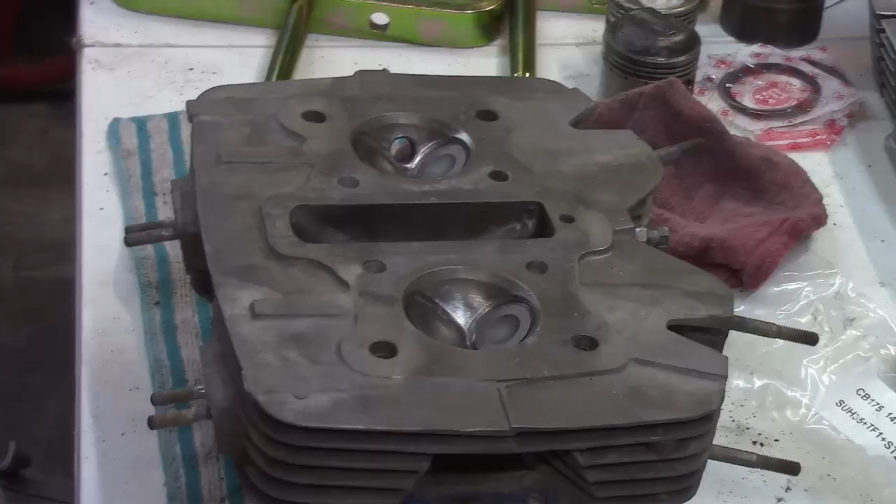Okay, what I got here, you can see it's the head. And I've got the valve sitting inside here. I've been looking at all kinds of different stuff, specs and everything. And of course, I bought new valves, so the valve seats and everything. Actually, like this portion right here, the shiny part, I don't need to measure those obviously because they're brand spanking new valves.

One thing I have noticed, and I don't know if I should get a hold of a common motor, but if you notice this valve here, these are the intakes. This one here, you kind of got to push it down fairly decent. This one here is a little bit easier to go in, or a little bit stiffer to go in. I don't know, but anyway.

I got some of this Prussian blue, so we can see where the valves are hitting. Then I've got the fine grade compound. We have the coarse grade compound. We have the old manual suction cup lapper. And I do have a section of hose here.

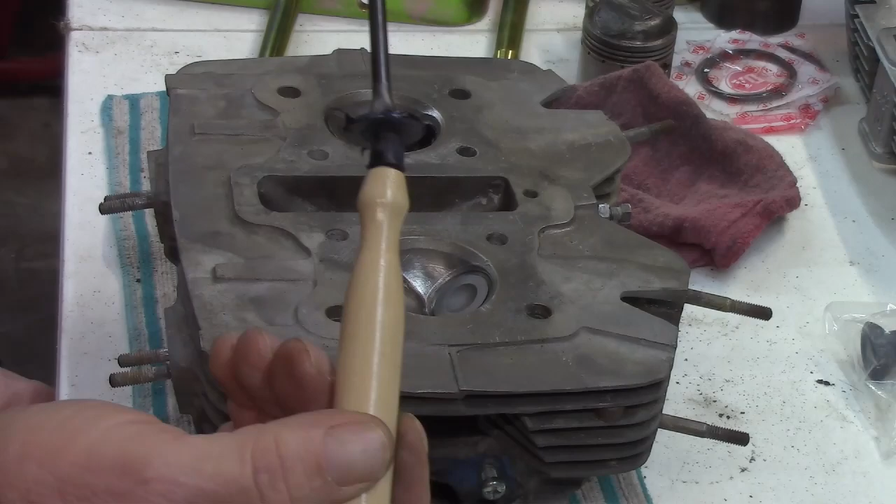And we're going to coat the end of the seat here, and I may have went a little too crazy with it. It's better too crazy than not crazy enough, right? Okay, so let's put it down here, set it down, kind of move it, I guess, and look at, I think I put too much on here. Let's try this again. Take some of this off. Try that again.

And see if I can see. Looks like it's making contact all the way around. Maybe try a little bit more. I don't know, never done it before, but it looks to me like I'm not really missing any spots. So let's wipe this one off.

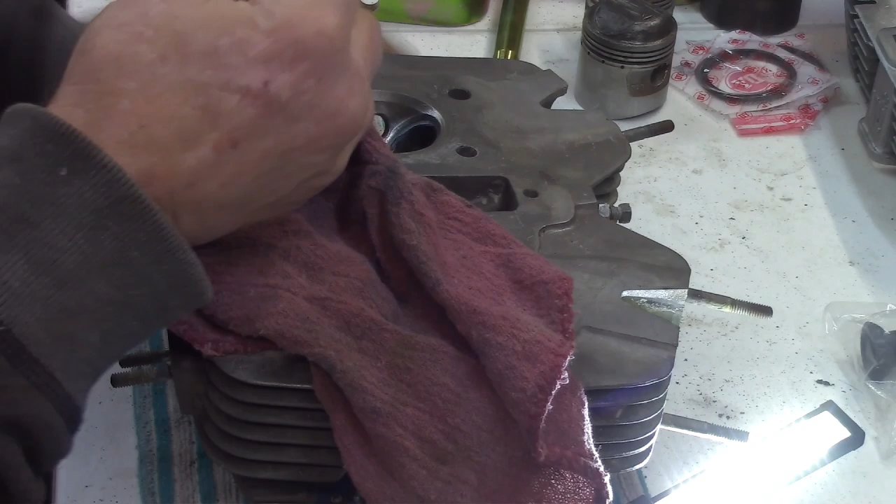And blind myself on my light. Okay, let's try the other one.

Sorry for any of the background noise, guys. It's a little chilly outside. Got the heater going.

Okay, so I don't know, man. Looks like it's sitting all the way around. Okay.

Now supposedly, and I gotta find my plugs. I got some of those little silicone plugs from when I powder coat stuff. I gotta find my powder coat stuff so I can find my plugs. Alright, so let's do this valve here. Try just pushing it on and not spinning it.

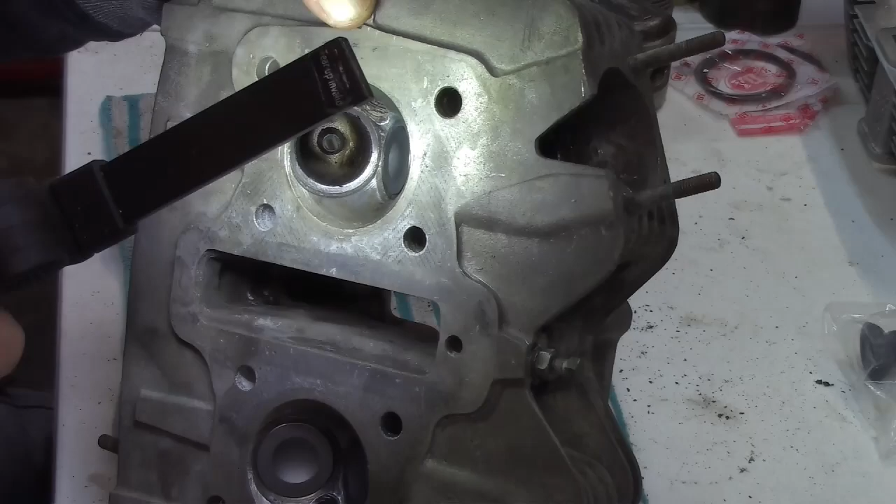Okay, so that one, let's see. I don't know if I'm going to be able to get you guys to see down there, but I didn't spin that one. I just pushed it down in there and let it sit. And you can see there are spots where the blue didn't go. And I do have the blue all the way around it, so we'll wipe this one off.

The intake ones definitely go in there tighter than the exhaust ones. Yeah, maybe that's normal.

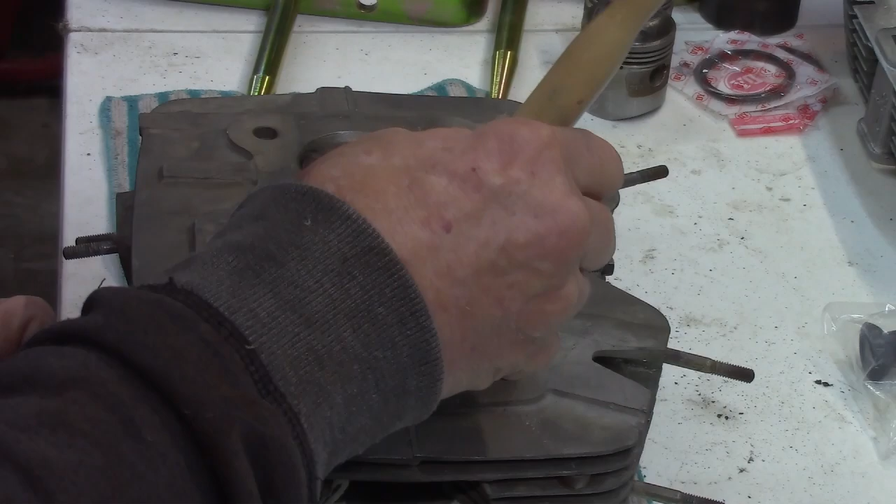Okay, so just pushing it in. Yeah, there's one little spot where it's not quite touching, but it is all the way around the valve. So, all right.

So anyway, back to the plugs. I guess there's two holes. I'll show you here in a sec. Well, you might be able to see them. Right there. That's the spark plug hole. I need to plug that because apparently you can plug those once you've got your grinding done. You can put, you know, like parts cleaner or whatever, pour it in here, and if it's not leaking out, you know you've got a good seat. So anyway, that's what they say.

Okay, so let's take this, this is some coarse. And we're going to take some.

Kind of put it on there. Drop it down. Well, my sticky thing is... my suction cup is spinning. Maybe the lick and stick method isn't that great. And that's the tiny side. Maybe try the little fatter side. Try licking and sticking that side.

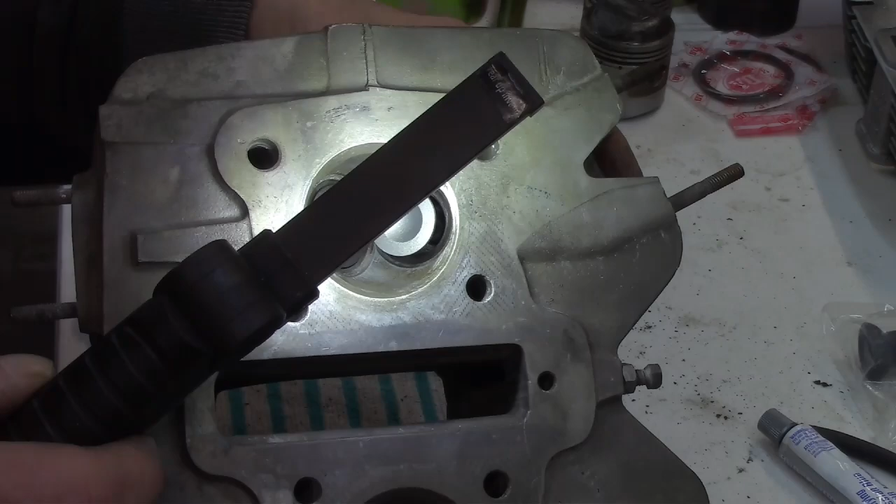Well. I mean, I don't know about the whole parts cleaner stuff down in there because it's not going to have the spring on it. I watched them do it and they did not have the spring on it to hold tension on it. Or maybe they did. Maybe I need to rewatch that video again. I don't know. But either way, if I don't do that and put the springs back on, I don't know if it's gonna leak out or what. Beats me. So let's put some on this other one.

Well, it seems to be sticking better to this valve. Of course, I say that, and then it comes right off. Woo. Got away from me. Let's wipe this one off. Take a look.

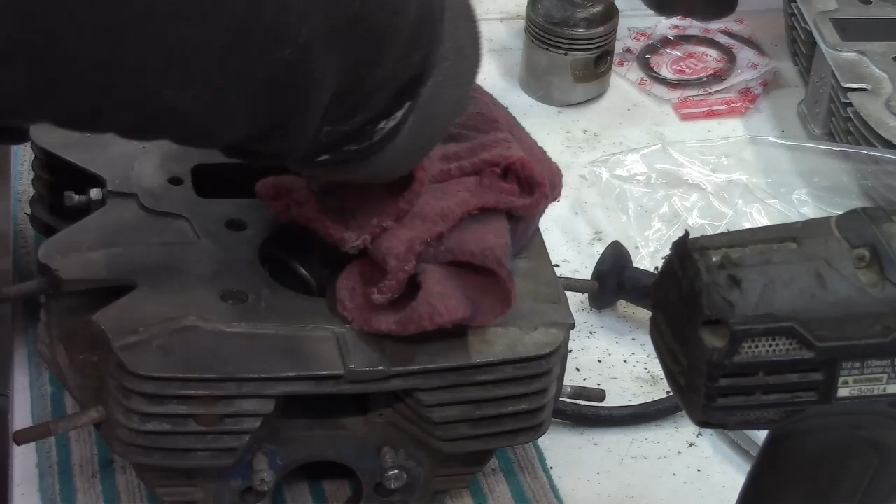Okay, so let's try putting this on the end. And then we'll put the drill on low. And is it not spinning? Is it spinning? Very light pressure, guys. Let's see. Got everything sticking to me. See if the seat looks any better. Yeah, that could be better.

Alright, so let's try this again. Well, even with that, the hose is liking to spin. Just doing it by hand still works better than the suction cup thing.

Still got to get all these gaskets off of these intake things, the side things where the tach thing goes, the spark arrestors. I can get all those off there still. Exciting stuff. I'd turn it around the other way, but I'm right-handed, so. See if that's done anything.

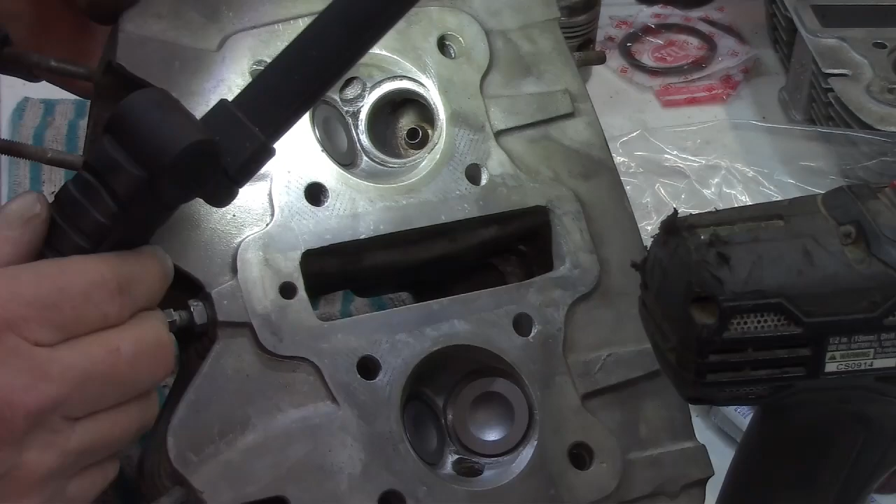Let's see where this is actually sitting down in here. So, I don't know, I mean, it looks pretty good. I think I'm gonna, let's see if that covers that area down there. No. Because there's some sort of buildup. Yeah. Come right off. I haven't really thoroughly cleaned this yet, guys. I did stick it in the ultrasonic.

I'm trying to round up things to look at making a vapor blaster, as we had discussed previously, so I could clean all this stuff up. Got my eye on a used Harbor Freight sandblasting cabinet, so I may get a hold of the guy tomorrow and see if he's available for me to come look at it. He wants $100 for it. They're like $225 brand new. So, as long as all the parts are there, that'll work. I'm trying not to spend a lot of money to make one.

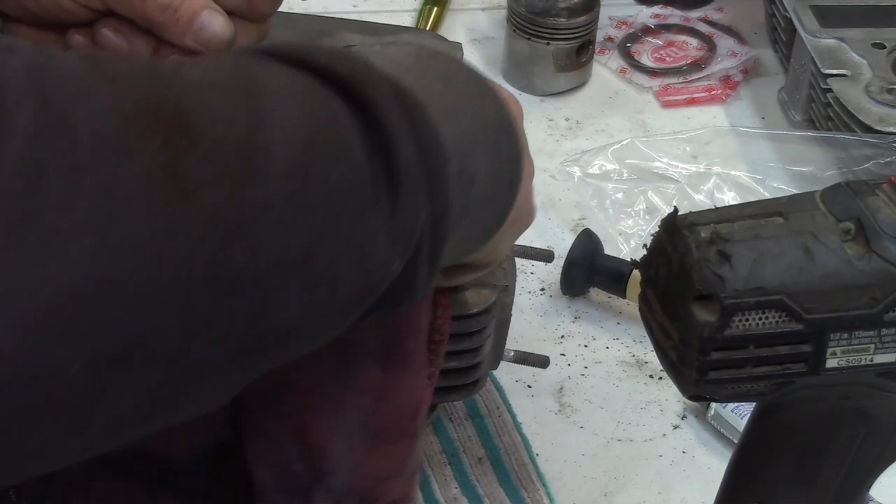Okay, so I think we ought to check this one. We've been spinning around and around while I've been yammering. And I couldn't find any information about doing this. Is each valve specific to the hole that it's in? So we've got 2 intake valves here. Let's say intake 1, valve 2. When you do these, it makes sense to me, you should leave that valve with that one you just did. That way, it's seated for that specific valve.

Let's see here. This one here is looking pretty good. Valve hole, let's just call it that. So, put that one down there. That seems pretty good. Okay, so that's coarse. We're gonna leave that, and like I said, once I get all 4 of them done, and I can find my little pluggy thingies, then we can put this in a tub, block them holes, I don't care.

I just put gas in there. It don't matter. Anything liquid, and see if they drip out. If they don't drip, then we've got them seated good. If they do drip, well, I guess not. So I don't know. So anyway, that was the coarse. So we will use the suction cuppy thing on the smaller exhaust valves because it seems to work okay.

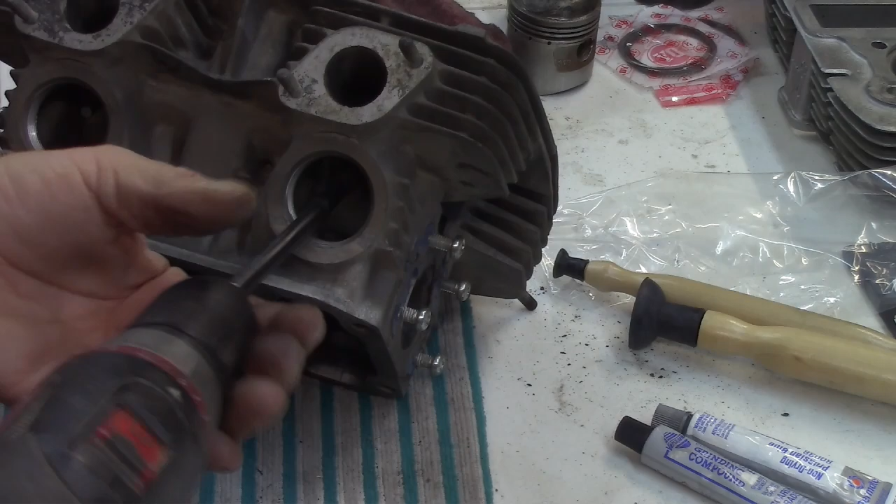I'm going to try this drill thing again. Yeah, why not? I'll just chuck it back in here. Yeah, I got a crappy piece of hose there. I do have a crappy piece of hose, guys. Where's my scissors? Maybe that's why it was kind of loose. I don't know. We're going to find out, though. See how that looks.

Now, Kane, I know you're going to be watching. What do you think about cleaning it and painting it? Give me your thoughts, man.

Dale ain't gonna watch. My shenanigans are too much for him. I probably drive Dale insane. Especially when I call him. But Dale, if you're watching, I hope you're doing great.

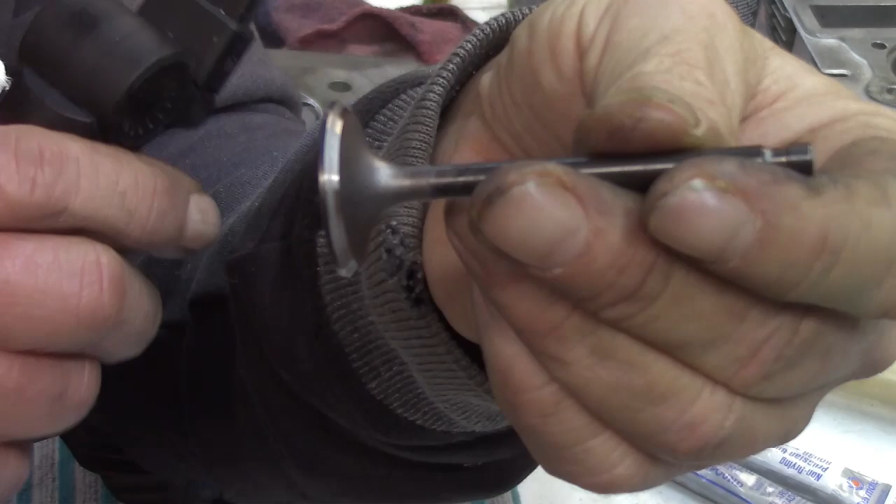Okay, what I am noticing though, I don't know if it's going to show up on here. The whole part of that seat, you can see where it's been ground. But it's not encompassing the whole seat from here all the way to the bottom. But looking down in here, it looks good. Let's shoot the other one.

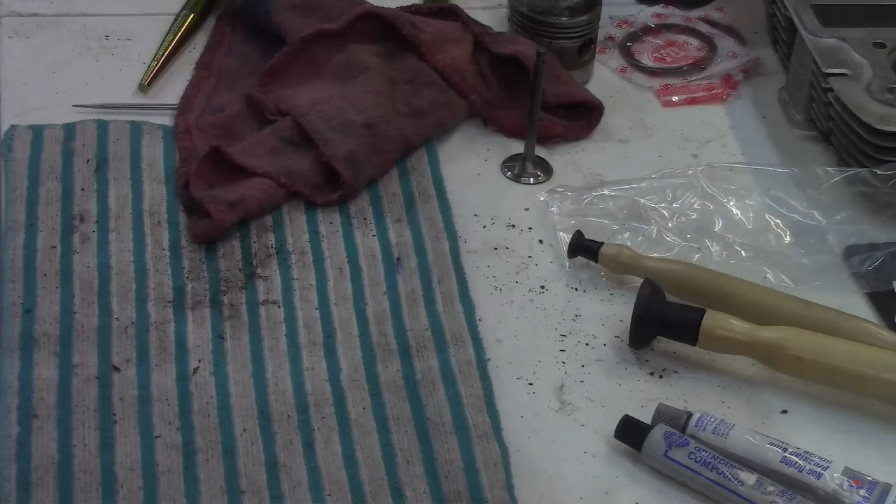It's pretty much the same. Just for giggles, let's grab one of the old valves. Kind of look at how it sits. See, it looks like it sits down there a little bit farther. So I may have to keep doing this because I don't know if this is going to show up on the camera.

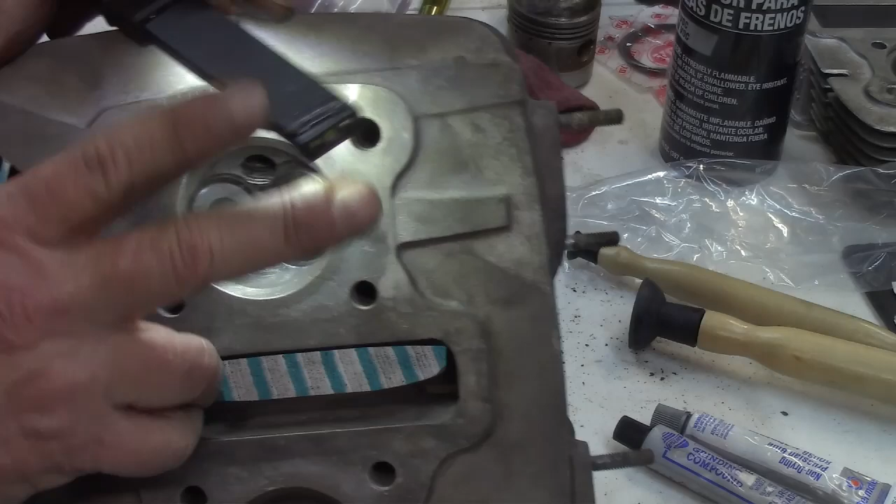You put that down in there, it seems like, trying to hold it and get light for you. Seems like from this edge, you know, to the seat, it's sitting a little more flush. And put this one in. Looks like it's definitely more proud. I don't think that's right. Yeah, this one definitely sits down a little bit more.

I wonder if that is the case with the exhaust side too. Let's double check. And I looked at all these valves. I thought one of them might have been bent, but that does not appear to be the case. So technically I could probably just reuse these valves, clean these.

Okay, now that one sits a little more. I don't know if you can see it. That one right there sits a little more proud. This is the original valve. And then that one looks like it's sitting about the same. So the exhaust sides look okay. It's the intake side that doesn't.

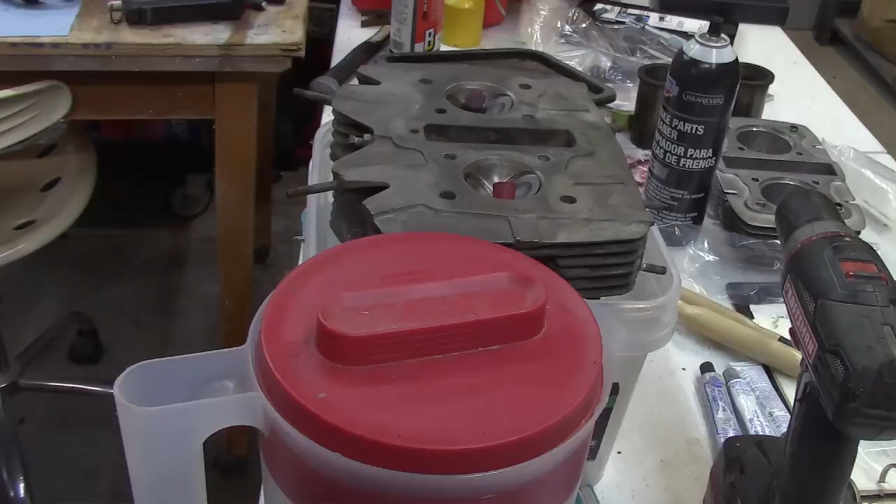All right, let's see how scientific this is. I got my plugs. Found my plugs right here. Those are used for powder coating. Let's see how well this works. Okay, there's one.

This is just water. Cats are going to be mad at me. I stole water from their cat food bowl. Their cat jug.

Okay, so they are completely submerged. And I managed not to spill any down in the bucket. Which, I need to clean this bucket because it looks like there's algae growing in it.

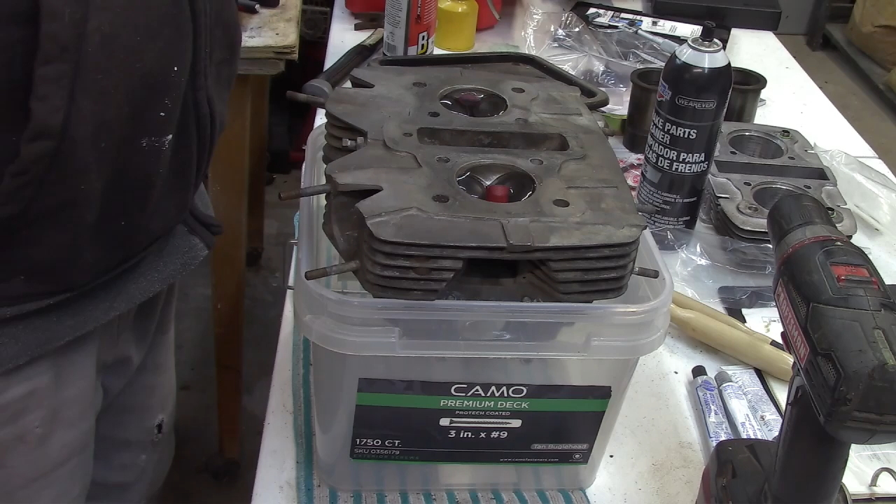Okay, I did do some checking, and the lip, the edge, doesn't need to be ground all the way down. You just need to have a uniform strip all the way around it, which, as you seen last night, we did have that. So that's good. It's a mixed thing, 50-50. Some people say you grind it all the way down. Some people say no. The one I was looking at where they said no was on the single overhead cam 4 forum for Honda bikes. A guy had an exact example of what I was doing, because that's what he was doing. He had the same question.

So they said no. Now, as long as this doesn't leak and this thing is dry, and I do not see any leaking, I do not see any dripping, I'm going to pause you guys, and then we'll come back in a little bit and see if we got any leakage. If not, then everything is great. If we do have leakage, then everything is not great, and I will have to lap them a little bit more. So I will bring you back while we're waiting for that.

Exciting stuff watching. Okay, this thing here, I have looked all over the place for this answer, and I can't find it. Now, if you remember, smart man me, we do have the green. I didn't write down the color combinations. I'd have to look at the bike over there. I did write on the plug the green one, but when I marked on these the colors that they were, I did it with the Sharpie and it came off. So I will have to, actually, the bike is right there.

Okay, so we have a pink, a green with a red stripe. One I was reading on said it was white, and then a yellow.

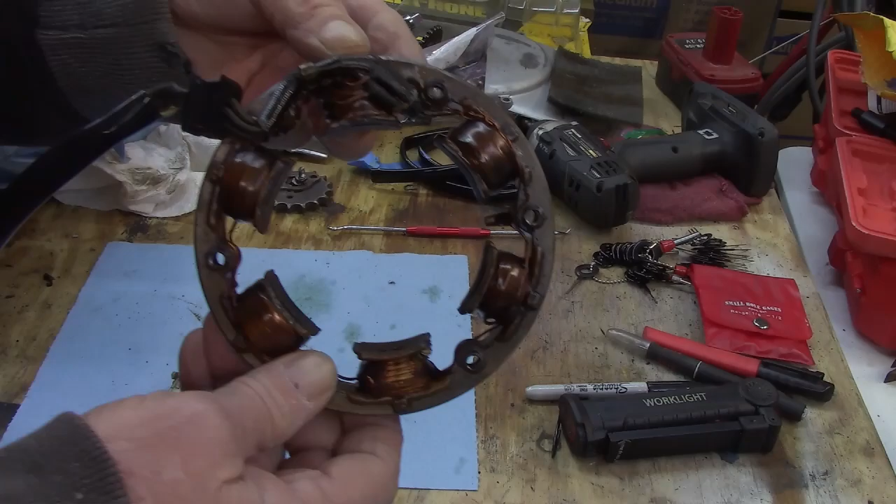Now, with that said, if you look at this thing right here, your stator, you'll notice that these are the 4 wires right here I'm pointing at. They all come into here, and they all tie into this right there where I got my finger. So it doesn't matter, really. I mean, does it matter what color is on this? Because looking at the diagram, the electrical diagram, and I ain't got that page up on my book. And looking at the one online, I have another one.

They show 2 of them going to the magneto. No, the voltage regulator. Two of them go to that. One of them goes to the, looks like the headlights. And then the other one, I forget, but I'll have to look it up again. So anyway, ultimately, I don't think it matters.

So, I mean, worst case, put the green where it is, put the other three, just find a spot for them. And then when I get to the point where I'm ready to start messing with the electrics on the bike, then deal with that. So, in the meantime, we'll come right back to this.

We still have no leaking. Woohoo! I actually did something right for a change. Uh-oh, wait a minute. I am seeing a little bit of water right there. That is on the exhaust side. So I have a tiny little bit on the exhaust side, but then again, I didn't tap these down with a piece of wood or anything. So, I don't know. I'll check once I've let it sit here for a while.

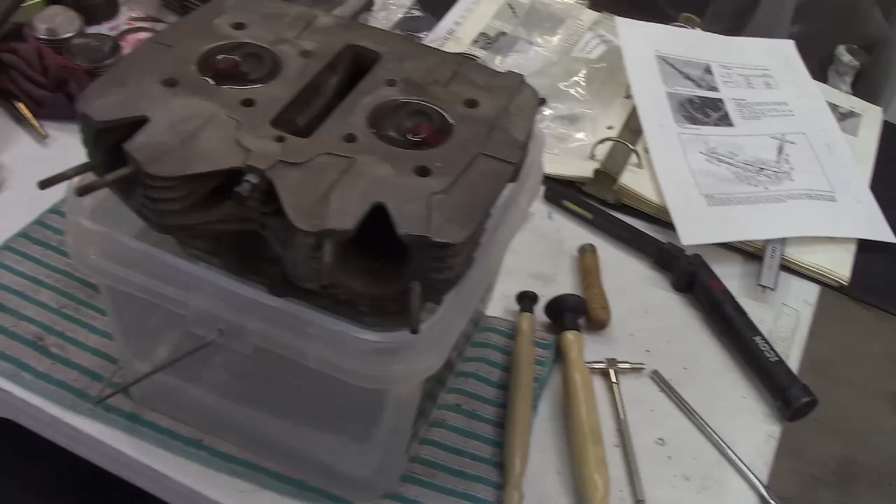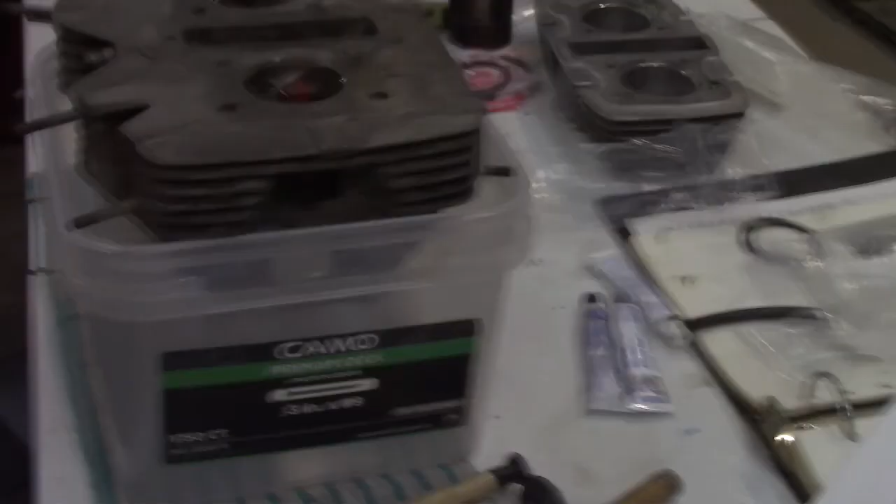Alright folks, well it's been roughly 40 minutes. What I did is I wiped it out, spun the valve a little bit and reseated it back in there, and I don't know if you're going to be able to see, there is a tiny bit of water down in there. Okay, so what I'm going to do is I will hit that again with the fine compound and lap it again just a little bit and see if that stops that.

However, on another note, from what I've read, for the amount of time it has sat, for that little bit of water to be in there, it is perfectly fine, and I could leave it as it is because I have no springs on them. So I'll hit it again with some fine, and then I will go ahead and put the valves back in and move on to the multitude of other things that I have. So anyway, I'll bring you back.

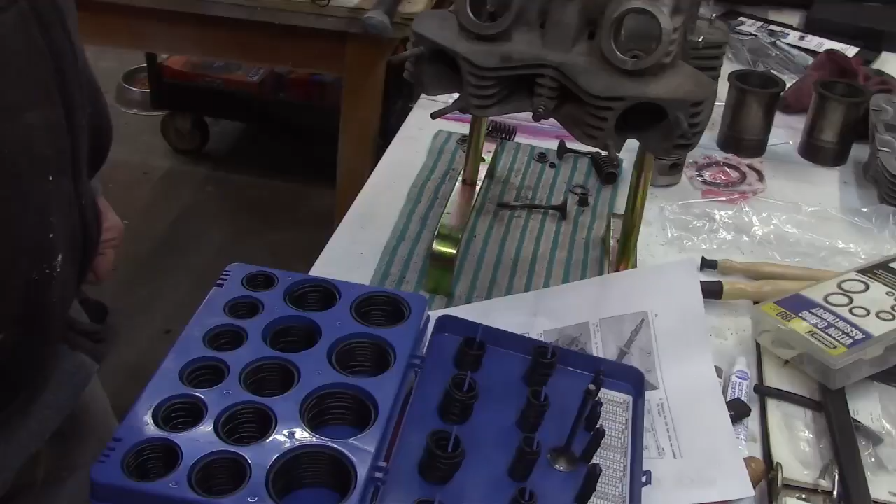Alright guys, I have a little dilemma here. I've got the parts diagram up on Partzilla's screen, and then I've got this printed out from the PDF version of this document. And they mention a 9.5 by 1.60 ring. So I'm looking, let me show you what I got here.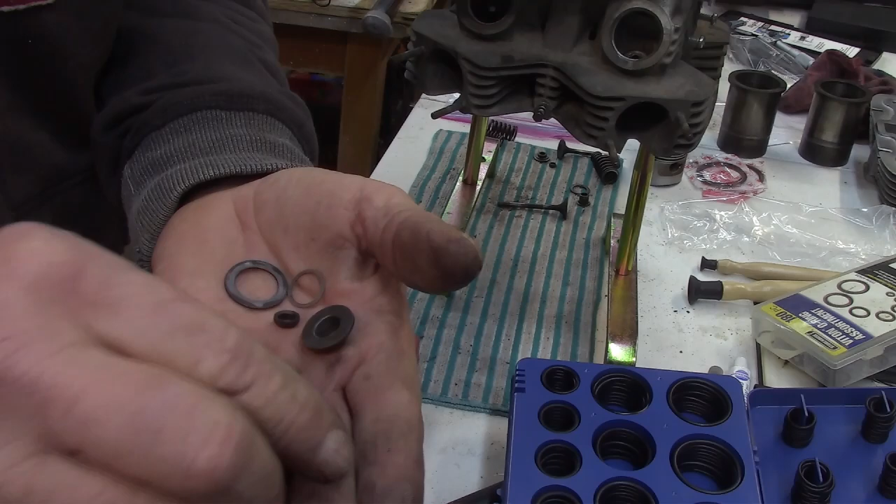Alright, so looking at my hand here, we've got the small washer, we have the bigger washer, we have this valve stem seal, tiny little sucker right there. Then we have the top piece here where the keepers go in. And then we have this piece here, which is called, what is that thing called? Valve stem seal cap.

Okay. Now, according to this diagram here, below this, you have the order that this goes in: big washer, skinny washer, then that rubber seal, then this valve stem seal, then this cap. I am missing it on either valve, and you guys watching that video, I kept all the pieces together and I put them in a sandwich bag.

So I've got out the old trusty Harbor Freight kit because I checked on Partzilla, they don't carry it. Checked on Amazon, they want like $15 a piece. $15 a piece for this tiny rubber seal. So it says it's a 9x5 by 1.6. So I'm guessing, is that metric? Okay, yep, it's metric.

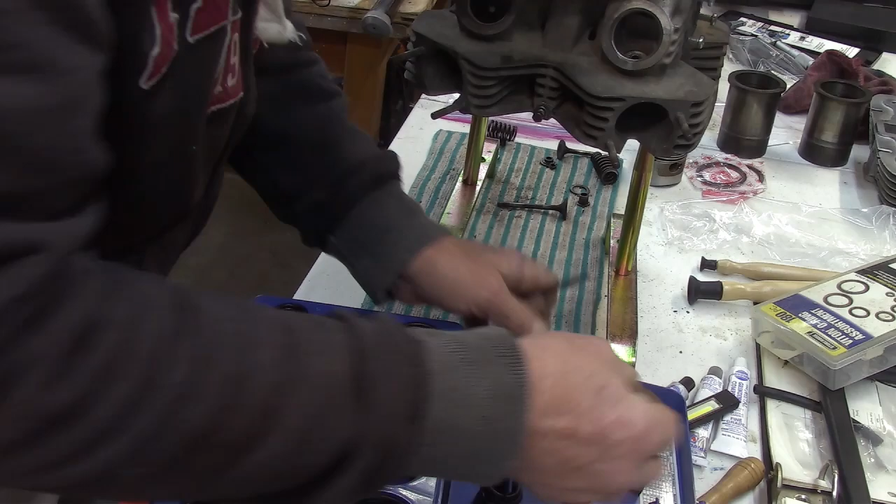Which would be a number 9. I plucked out an 8, so let me put the 8 back, 'cause I'll be damned if I'm gonna pay 30 bucks. Okay, that fits over that. So according to this, it fits up underneath this cap here, which will go down inside there.

And honestly, I think this is a 9.6 by 1.9. This is a 9x5 by 1.6. Well, this is going to have to work. I don't know. So that was a number 9. I'm going to take 2 of these out and see if that'll work.

I'll assemble all this. Actually, while I got you guys hanging out here, let me see how this will fit in here. Put the valve back in there. Okay, so we got the valve in. Then we've got the big washer. And then we've got a little washer.

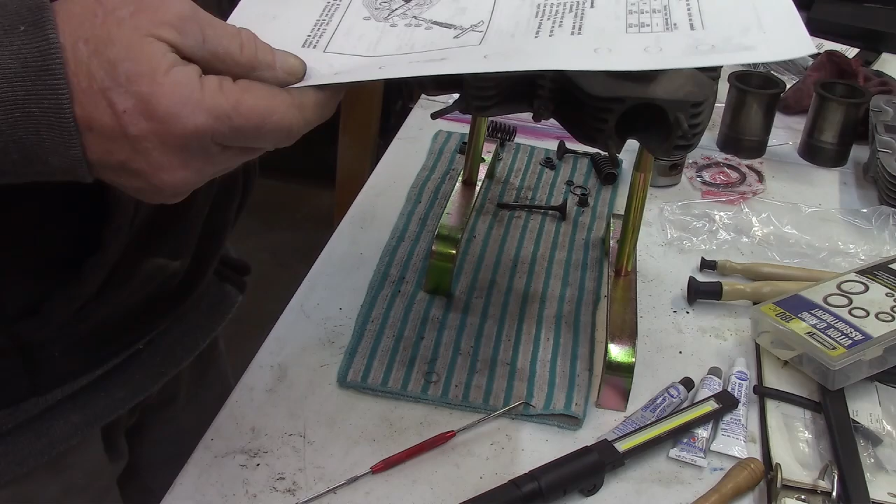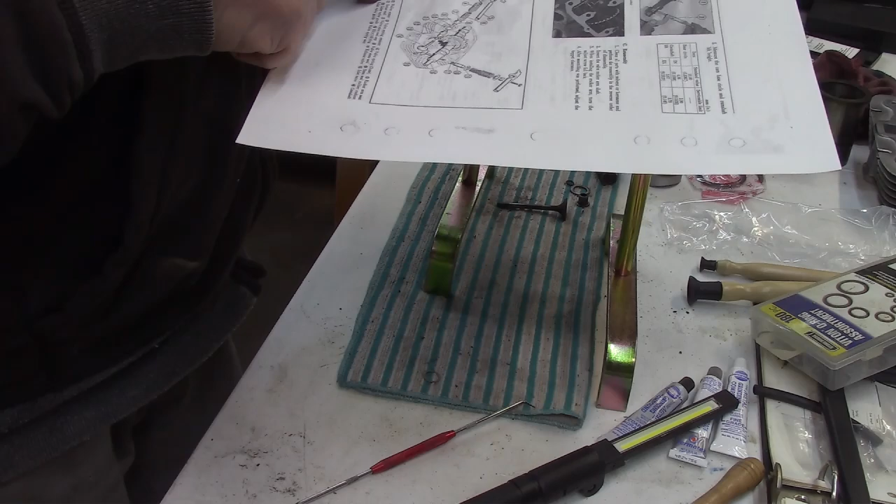And that's another thing I'm confused about, because this diagram is different than what's on Partzilla. So number 10 is a valve spring seal, B. And then number 7 is an inner seal. Yeah, I don't know, man. I'm confused about this, so let's count how many parts.

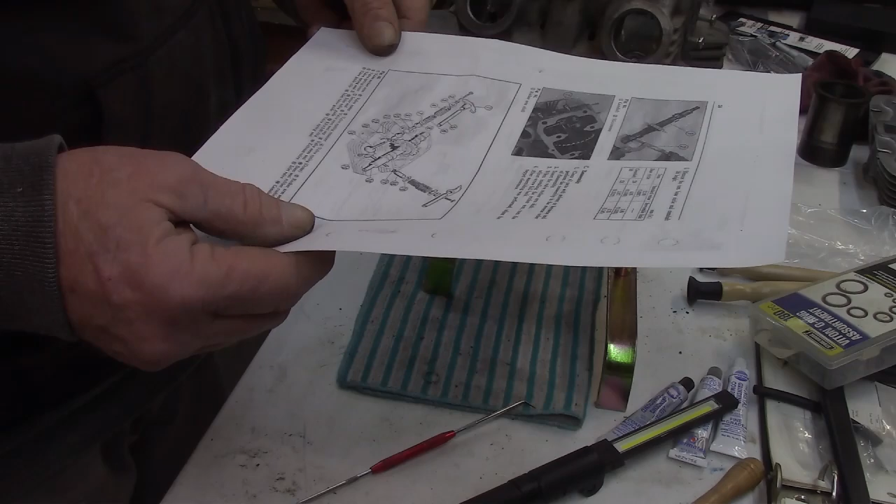Okay, so we've got the washer. 1, 2, 3, 4, 5. 5 pieces before you get to the springs. So we got 1, that little one, 2, 3, 4, 5. So what am I missing here? Based on this diagram, let's go ahead and put this small washer in. Use our little pick here. Knock that down. There we go. So now we have a big washer and a small washer.

And then number 9 is, which one did I say 9 was, the valve stem seal. And then 8, it's hard to read this without readers, is the valve stem cap. Okay, so and then 13.

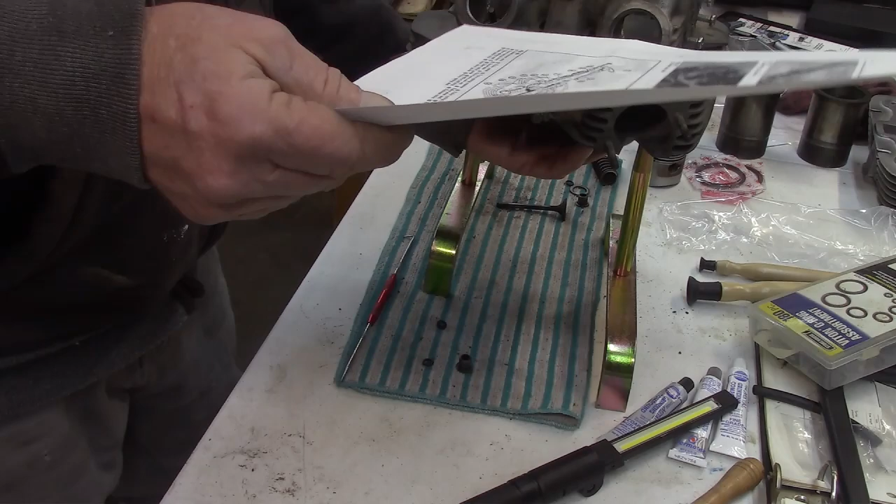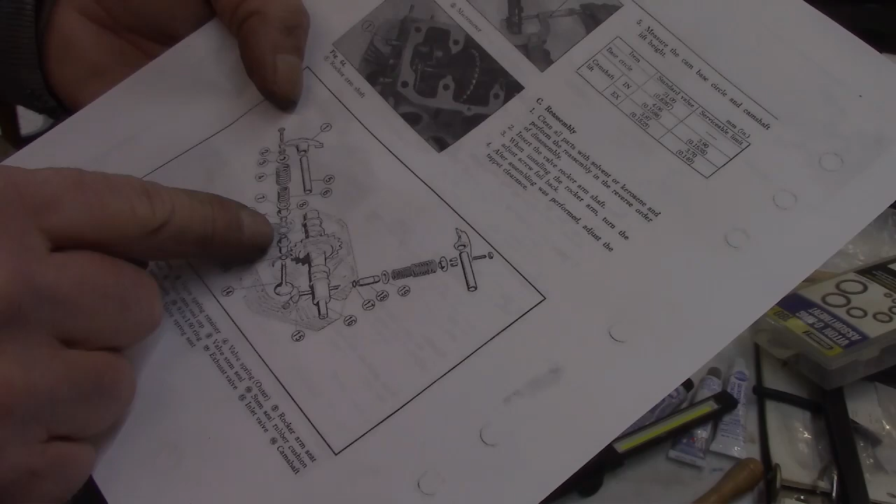Wait a minute. Looking at this diagram, trying to zoom in here, that washer number 13 is the 9x5 by 1.6. That's going to go underneath the valve guide, so it's going to sit between the valve guide and the head. So number 9 would be a valve stem seal, which if we use this one here, it rolls right over top.

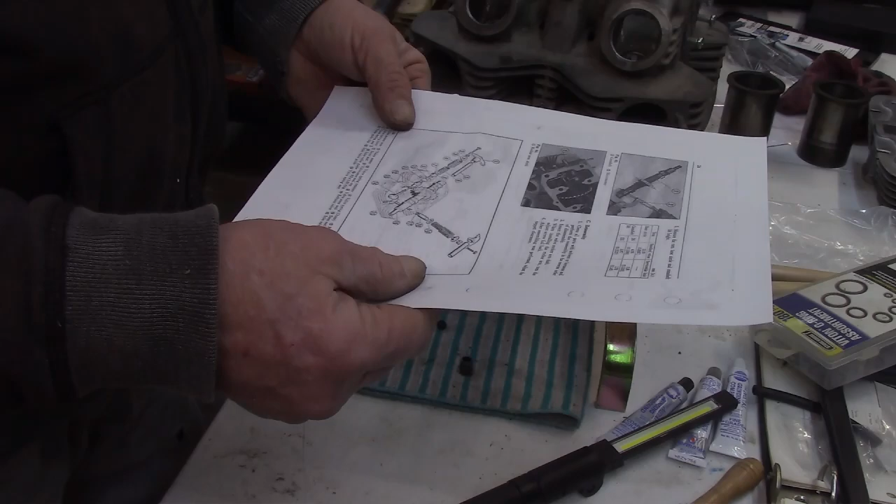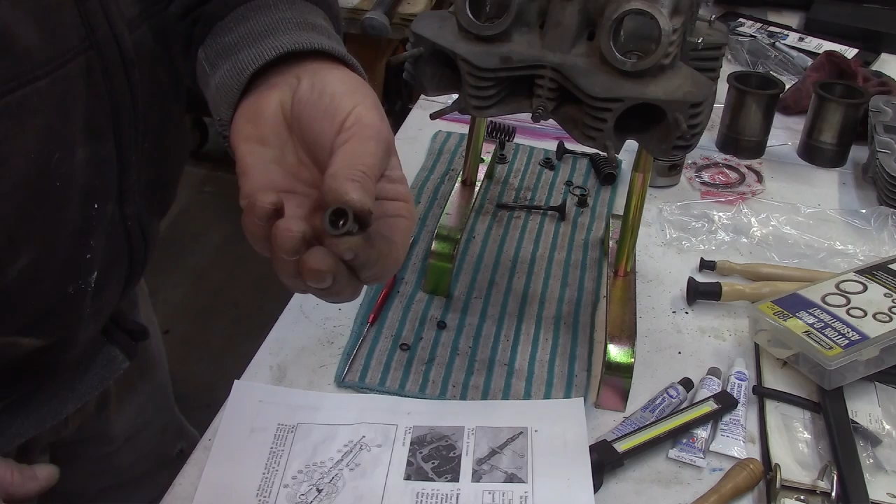So it doesn't give a dimension on here for that, but it's after the small washer, but before this cup right there. So it's going to sit inside here. So I wonder if that size will work. I really have no idea. I am a bit perplexed over this because if this thing had had a valve job in the past, they omitted those 2 little rubber washers.

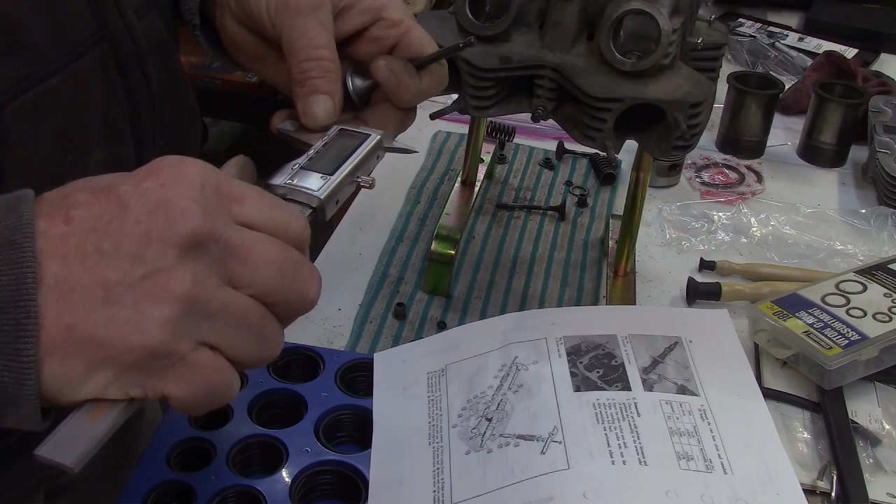Now, with that said, that washer number 8 was inner diameter of 4.8, outer diameter of 8.6. So, where did I put my valve? We measure this. Oh, my battery's dying. This is a 5.5 outer diameter, so it'd be a number 9. That would fit that. I'm gonna have to change my battery already, I just got it. Okay, so we're going to stick with the number 9 for the time being.

I guess worst case it grenades itself, right? So let's get this out of the way. I will post this up before I continue on. And see, it shows that washer there. Then it shows the valve stem seal, which is that tiny one, and it goes up.

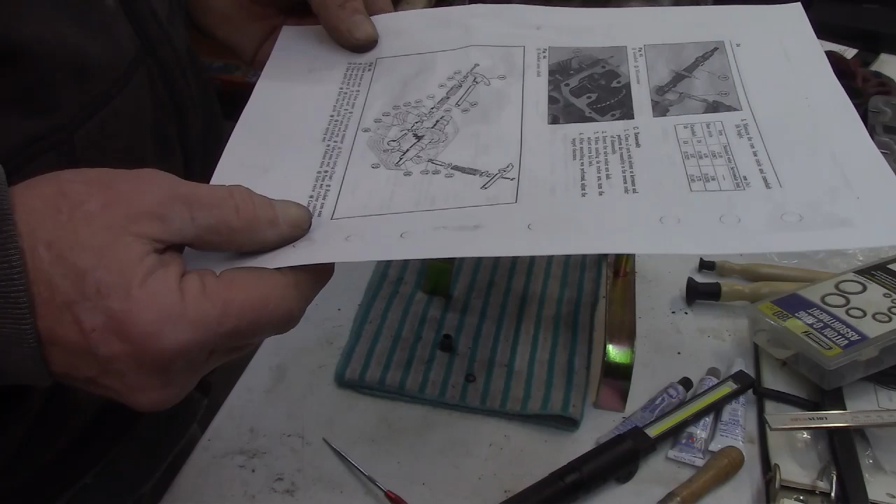And then you have, but now I'm confused. I'm confusing myself again because then it shows this sitting over top of the cap. Or does it? 9. Yeah, this is confusing. Sorry, guys. You would think when you take it off, it's going to have all the parts you need. But that number 7, it just says inner seal. It doesn't say rubber. It doesn't say metal. I'm going to look on Partzilla again and see what they show. I'll be right back.

Okay, I'm making a decision here. What this diagram shows, that one seal is underneath. Where's my little magnet at? Oh, there it is. Let me get this small ring out. So the order that it shows is big ring. I've got that up on the screen over there. Then it shows this rubber thingy before.

Get this thing out of here. Come on. Oop. All these tiny parts, are they really necessary? Okay, so then it shows this washer. I'm going to put that down. Then it shows the valve seal. That's there. Then it shows the cap and that small washer.

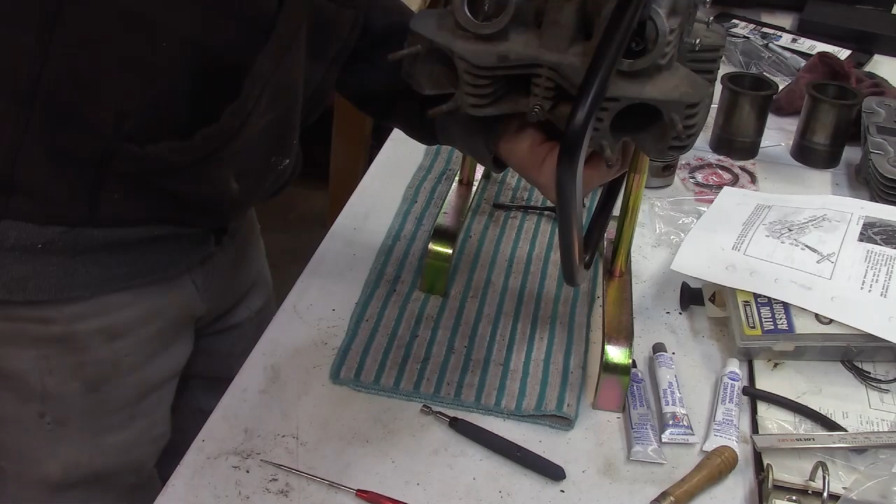My little handle. Let me turn you guys up a little bit. Or do I got you zoomed in? Nope. Had to turn the heat on. It's kind of chilly in here.

Okay, so now that is done. That's on there. We need two little keepers. Honestly, I'll be the first to admit, I have no idea if, well, that rubber thing, I don't know. However, those parts weren't there. So the parts diagram on Partzilla is not the same as what's in the manual, and so I'm going to go with what's in the manual. It doesn't mention the size of that little rubber thing, but that 9 by whatever one fits. So now I need to find where I put my grease. Hold on a second.

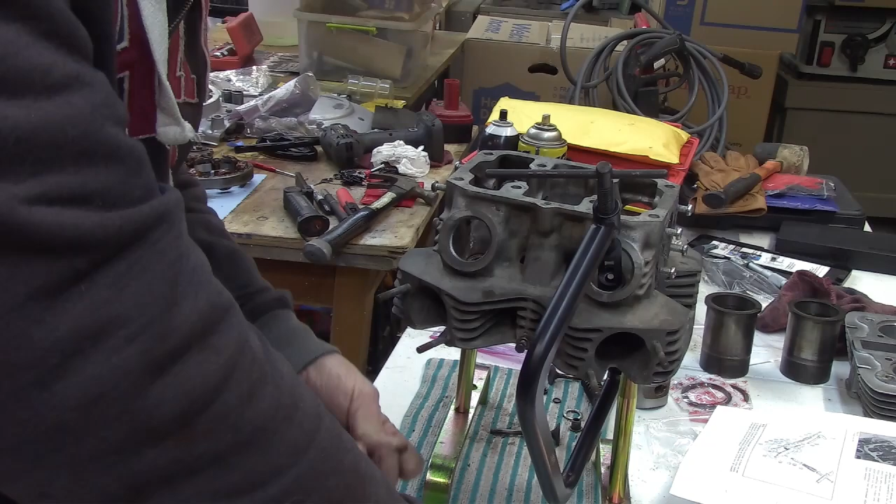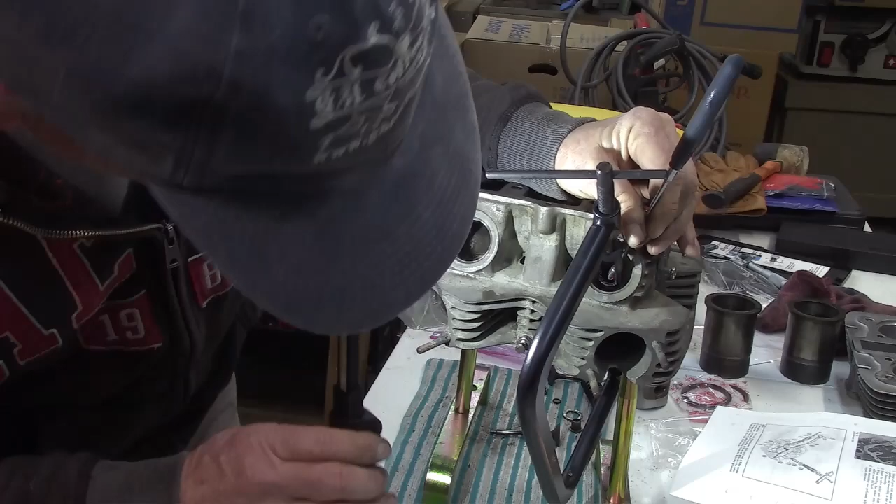So we can kind of put those in. That ought to be fun. Put some grease on it. Put a magnet on it. That's easier said than done. And of course this thing does not, see if it'll stay there. Well, that is challenging, guys. What the heck? It's like that game of Operation. Ah, it stayed stuck. Put a little more grease on it.

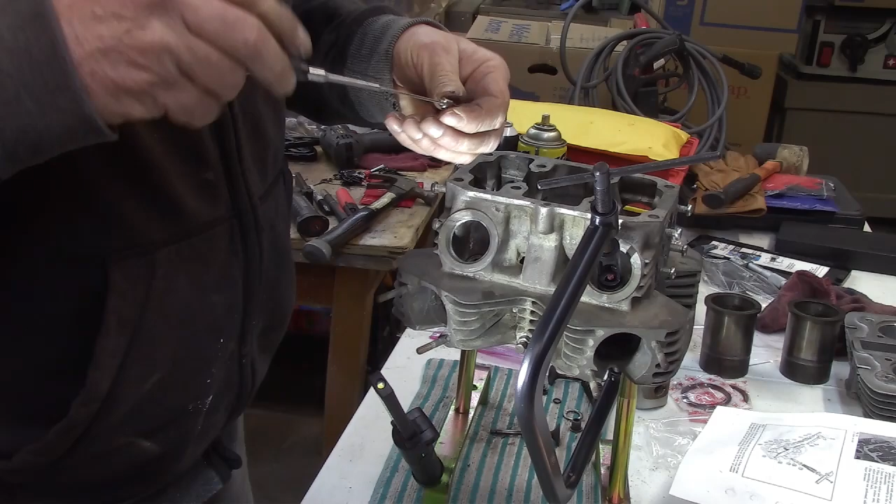And the magnet's nice, keeps you from dropping it, but see if I can use my pick to finagle it down into position. I don't think that's the right orientation. Well, crap. It's got to go down, skinny side down. And I can't fit my fat fingers down in there. I don't think anybody could fit their fingers down in there.

Oh, turd. Maybe I need to compress it more? I know my big old head's going to be in your way, and that light is freaking blinding me. That I needed. Oh, Jesus. This is stupid hard. Tell you what I need is some really small pointed needle nose pliers, because once it's on the magnet it don't want to come off the magnet.

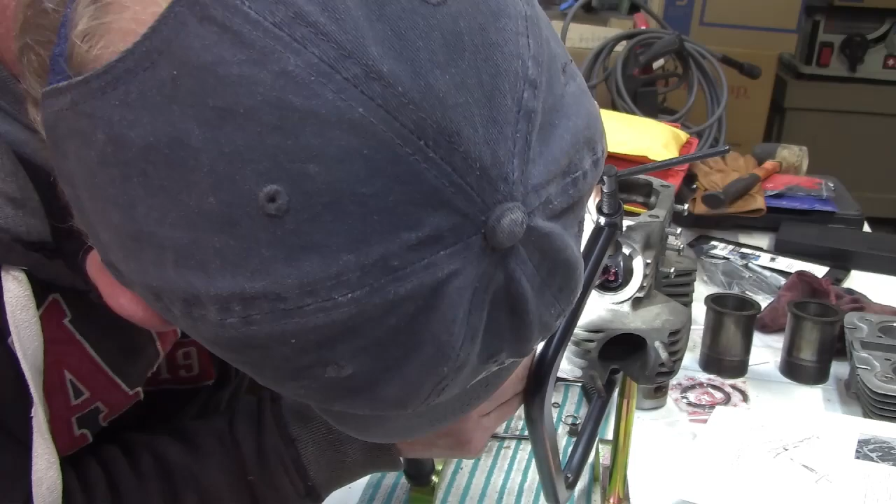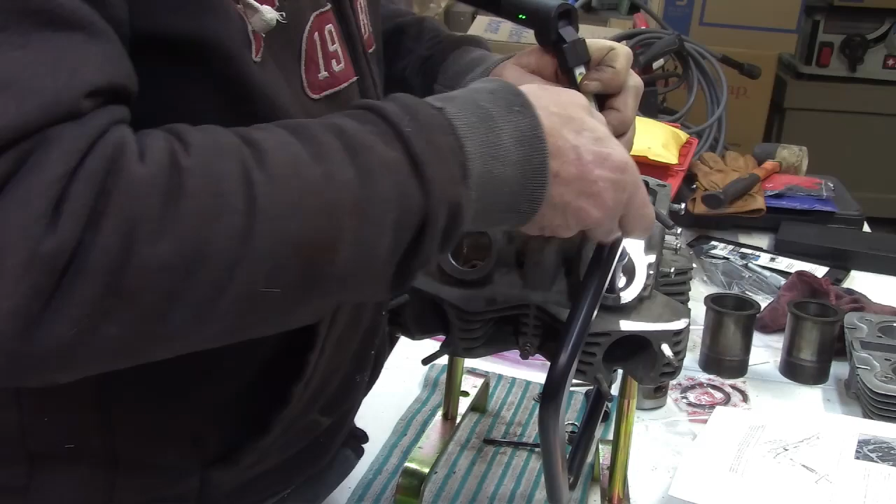Well, the magnet is great for some things, not others. I don't think that's seated in there, right? Nope. I can't tell, guys, honestly. I can't tell. I see one is sitting down farther than the other. Maybe they'll meet up. Let's see.

I'll show you here in a moment. When these things go flying, I'm screwed. Oh. Kind of worried there, man. The valve fell out. That's the other valve. False alarm. Okay, let me get a paper towel, wipe this off, and I'll show you. This is tricky. Good thing I do this for fun, right?

Let me get the readers so I can make sure that they're level with each other. I can't see where the crap. Okay, they are perfectly seated. Let me bring you in. We're in for the money shot. See down there? Look at that, perfectly seated. Okay, so we have one valve in. I only got 3 more to go of that fine, tedious process.

So I don't think I'm going to bore you with the other remaining ones. I think we kind of resolved that issue with the little rubber doohickey thing. So what I will do then is go ahead and get these other ones done, and then I'll bring you back here momentarily, so stay tuned.

Alright guys, this is done. You're looking at the intake side right here, and let's spin it around, and you're looking at the exhaust side right there. I will say that is a very tedious job. Very tedious. I don't think there's really any big trick to it, but you definitely need said spring compressor for the valves. That's some cheap thing I got on Amazon. Works great. Putting the keepers in, that's the tricky part. These magnet tools right here are great for the job, but what happens is they're pretty strong.

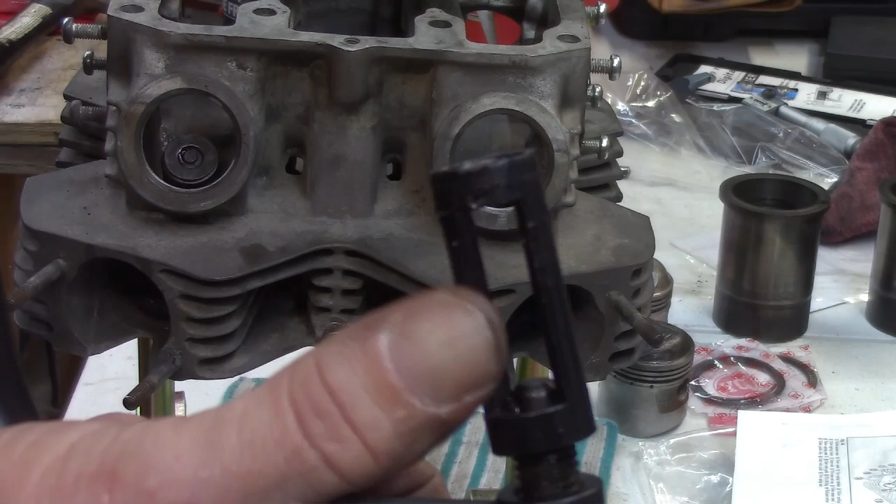So you've got to kind of put it in there in between. What makes it hard is you've got to get it in between this right here, so you don't have a whole lot of room to work. I found that the best thing for me was to put the keeper on, tapered side down, put your grease on it, kind of get it in position and push it against the back wall of the spring, and then pull your magnet off, and then take your pick and move it around into position.

They don't have to be perfectly lined up as long as they're close to each other, because as you're slowly lifting it up, it'll push them into position. So I did figure that one out. So there you go. Valve job done. Thumbs up. So yeah, I'll keep these old valves. Probably put a little dab of grease on them, because I think these valves are still kind of good.

I mean, if I get a really crap bike, I'll put some grease on them, keep them from rusting. But I think they could be lapped again just fine. They don't look like they're really pitted or anything like that. So here, I got you zoomed in. Let's zoom you out. Yeah, they're not. These are the intake side. And you can see on the back sides of them, they're really not in bad shape. So, I don't know.

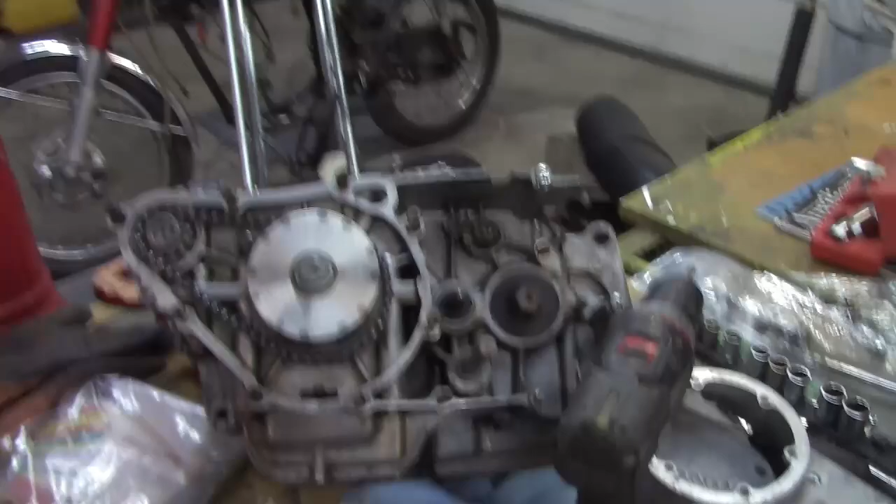Let me get you over here. I've got these 3 washers, the smaller ones, bushings, seals. This one here, according to Amazon, is in my mailbox. So I'll get those put in, and then I can get this side of the case buttoned back up. And what else do I have to do? I've got to clean those spacers for the carbs. Still got to mess with the carbs. I haven't even looked at those. I've got to heat the cylinder up so I can drop the sleeves back down into them. And yeah, I'm going to just double check.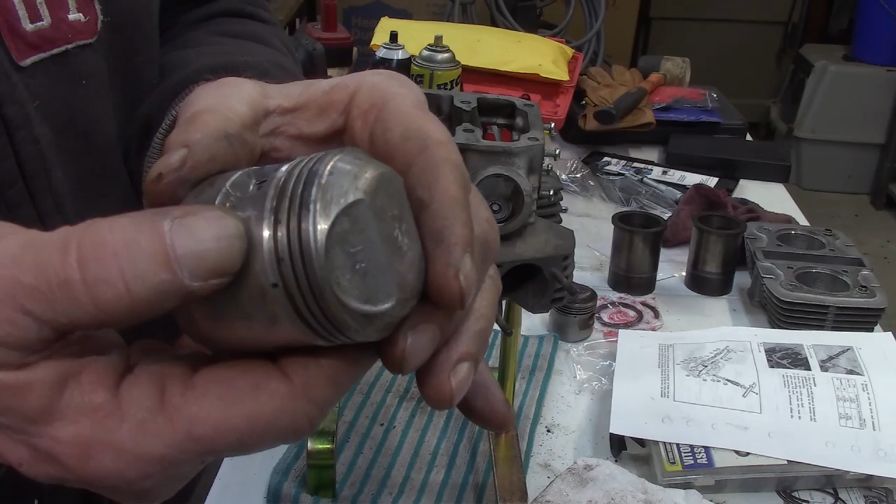And one thing I did want to point out, and maybe this is normal with these, on the 4-strokes, here's your piston right here, and if you look around it, there are no pins in these things to hold the rings in place. I have looked on both of them, and there are no pins whatsoever. So I'm guessing the rings just float in there.

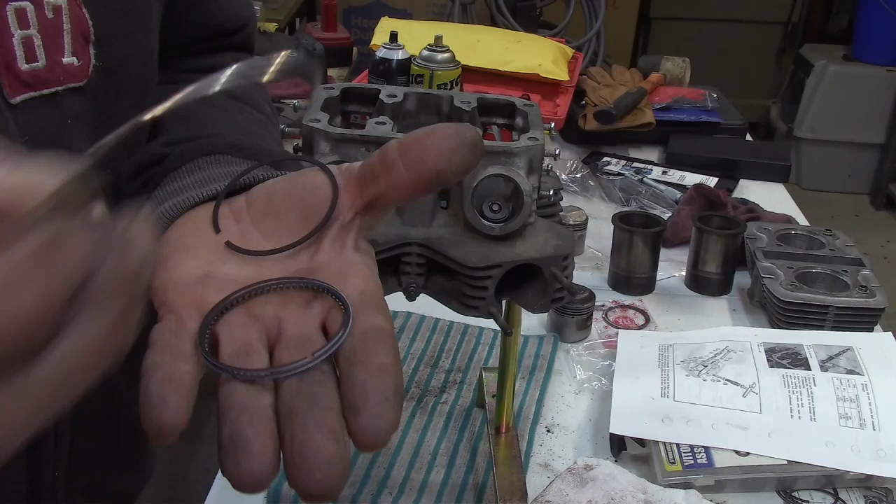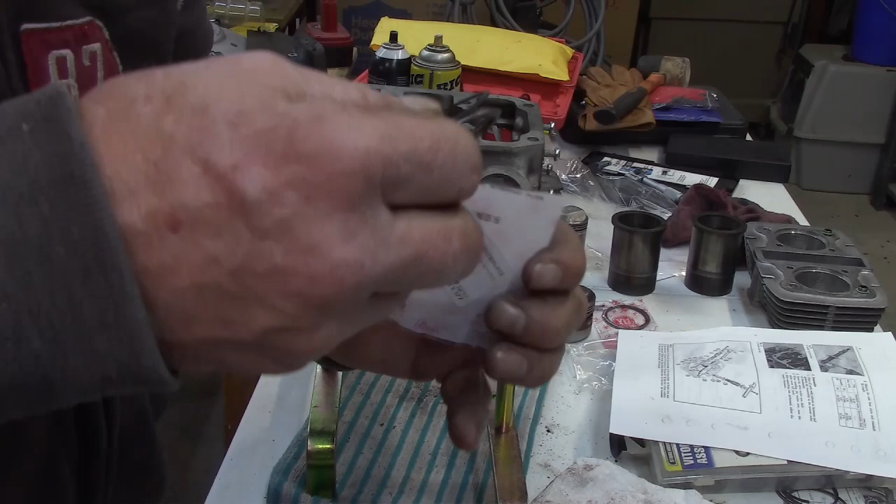And here is my Chinese set of rings. I'm thinking the black one right here in my hand is the top ring, middle ring, and then you have the 3 rings that comprise the oil ring. So yeah, we'll see about that. Like I said, I've still got to measure the ring gaps on all those, make sure they're good. What else do I have to do here? Just kind of clean up some of my mess.

And I would really, really like to build a vapor blaster before I put this thing back together, so I can clean this head up. This one here actually doesn't look bad, it turned out really good. I just put that in the ultrasonic. It looks nice and shiny. But if you put the two next to each other, you can see how much shinier this one in my hand is versus the head. So I would like to clean that up.

And if I'm going to do all this, I'd like to do it now before I put this engine back in the bike. So anyway, that's a project for another day. And then continue on with all this other stuff. So I'll be back.